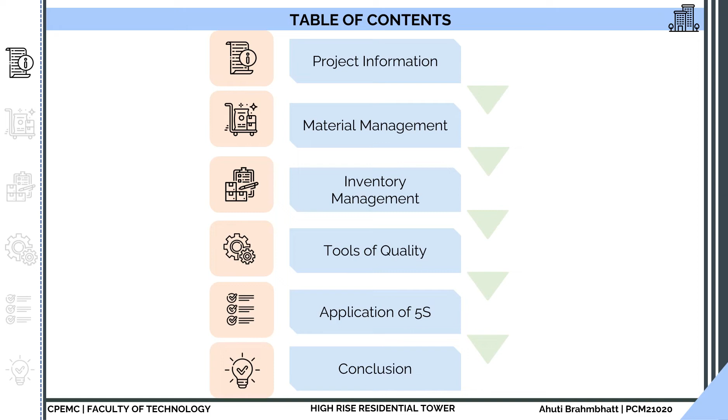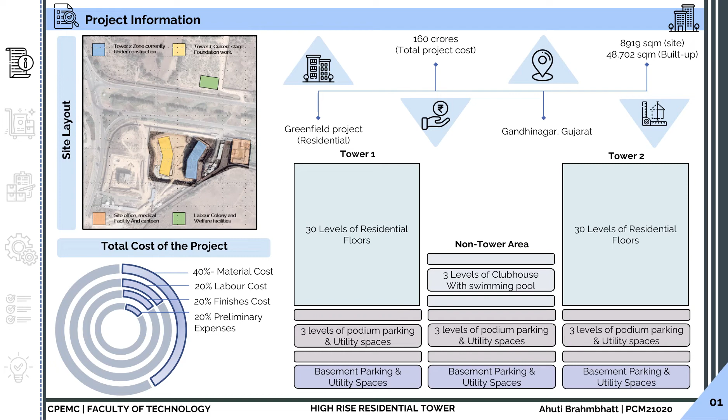Discussing the project details, it is an ongoing project in Gandhinagar, Gujarat. It's a greenfield residential project with a total cost of 160 crores. The site layout and visual representation of the project are shown here. The residential tower comprises two towers with an adjoining non-tower area, all having basement parking, 3 floors of podium parking and clubhouse in the non-tower area, and 30 floors of residential building in Tower 1 and Tower 2. The total cost of the project includes 40% material cost, 20% labor cost, 20% finishes cost, and 20% preliminary expenses.

The first activity is material management. Material management is one of the most important aspects of project execution, comprising 40% of the project cost. Talking about material store management, a layout of the material store has been prepared.

At the entrance, we have the store manager's office, and storage of material has been done by categorization named electrical material, plumbing material, and safety material.

Taking into consideration the pertaining issues in store management, 5S was applied on the material store and some suggestions are illustrated. The problems observed in the material store are improper disposal of packaging material, no provision for control of monitoring, lack of monitoring, manual estimation, and lack of inspection checks.

Some of the suggestions are provision of waste segregation bins, a material issue counter, checklists and surveillance, BIM and streamlined procedures, as well as organizing frequent audits from the head office.

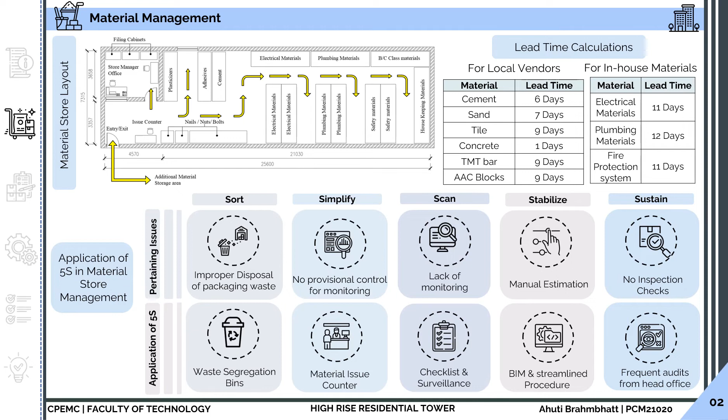Talking about lead time calculation, it helps us understand the minimum time required for the supply of material to the site. For our site, cement, sand, tiles, concrete, TMT bar, and AAC blocks are procured from local vendors, while electrical material, plumbing material, and fire protection systems are procured through the in-house team.

For material classification, ABC analysis and HML analysis have been done. ABC analysis is a technique for categorizing inventory items according to their substantial impact on the overall expenditure of the organization. From ABC analysis, it can be inferred that reinforcement steel and cement are A-class materials, while admixtures and binding wire are C-class materials.

Talking about HML analysis, it is used to distinguish materials according to high rate, medium rate, and low rate. From this, we can infer that reinforcement steel and binding wire are high rate materials, while aggregate and sand are low rate materials.

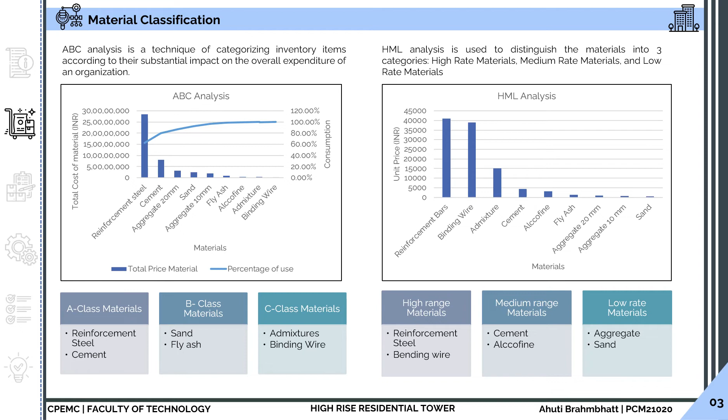The next activity is inventory management. In inventory management, economic order quantity (EOQ) has been calculated, which is defined as the optimum order quantity that minimizes the total variable cost of ordering and holding inventory.

Calculation of EOQ was done using the simple classical model. As per this model, the economic order quantity for reinforcement steel is 33 metric tons, and if this protocol is adopted on site, around 42,000 can be saved annually.

The second model is the price break model, in which different lot sizes were selected according to their purchase cost. It can be inferred from the price break model that purchase cost and EOQ have an indirect relationship, whereas purchase cost and total cost have a direct relationship. The preferred purchase cost is 64,000 for a lot size of 150 to 180 metric tons of steel.

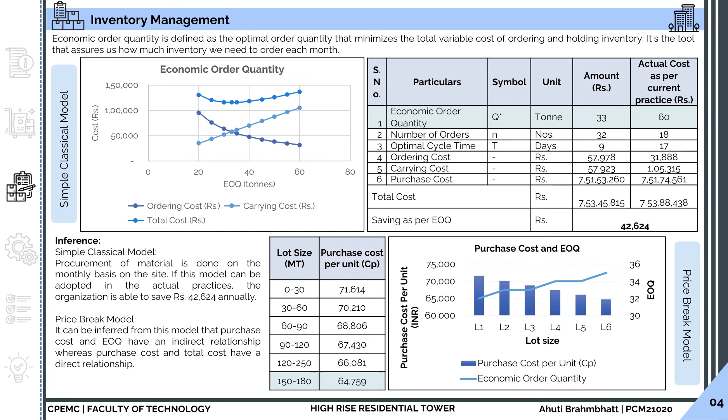Talking about safety stock and reorder point, it gives an idea of when the reorder can be placed. In the first graph, total stock-out cost and carrying cost are minimized at a safety stock of 9.34 metric tons, meaning the optimum level of safety stock is 9.34 metric tons. From the second graph, the reorder point is 39.08 tons, meaning that when inventory reaches 39.08 metric tons, a reorder can be placed, which will arrive on site within 7 days.

The next is the shortage model, in which shortages are planned to occur, leading to back ordering. From the shortage model calculation, the optimum level of 13.48 metric tons should be maintained at the site, which can reach up to 26.95 tons of maximum inventory level.

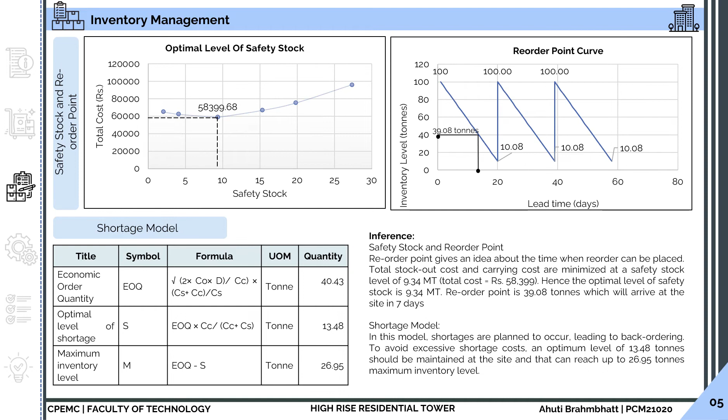Next activity is quality tools. Quality tools are implemented in the various steps of process in order to define the problems, measure their impact, find out the root causes, and solve this problem to ensure the production of non-defective items. The quality tools which this portfolio describes are control charts, Ishikawa diagram, and histogram.

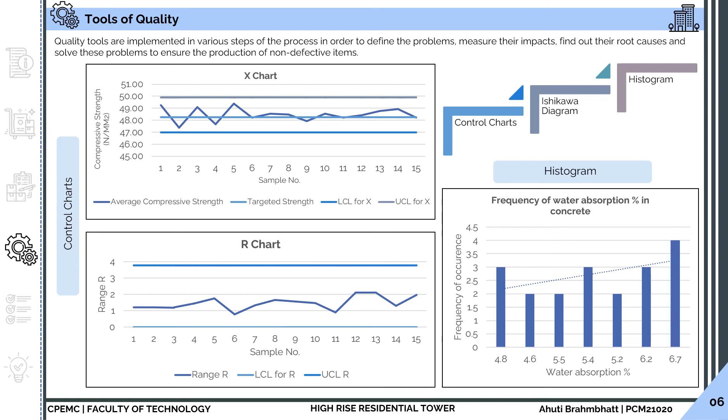Secondly, histogram. It is used to show the frequency distribution. Here, histogram was prepared for the frequency of water absorption percentage in concrete.

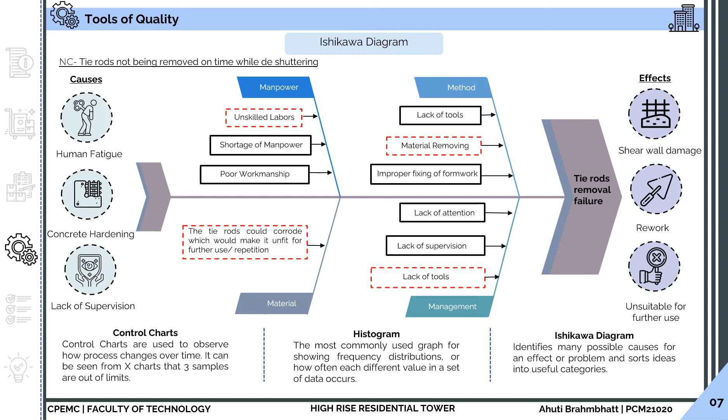Last activity for the portfolio is application of 5S. 5S is a Japanese tool which is used for increasing the efficiency and value via application of specific tools. 5S stands for sort, set in order, shine, standardize, and sustain. The scope of work selected for the application of 5S is steel stacking yard.

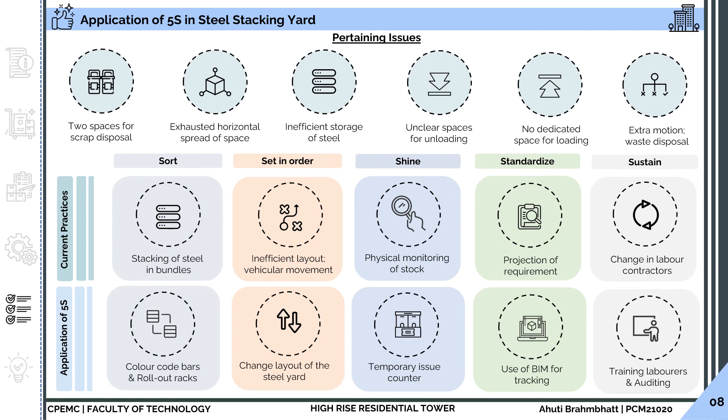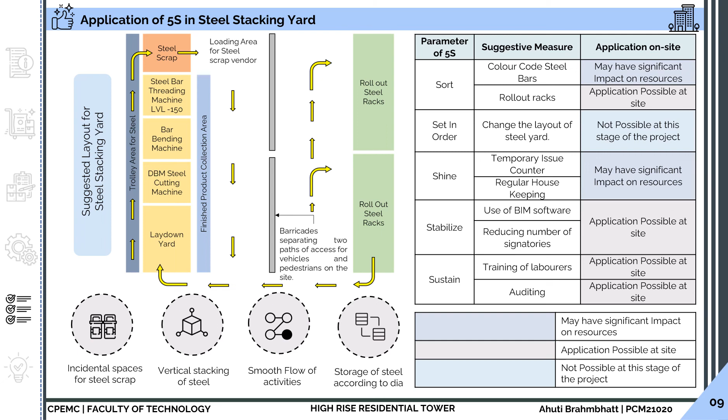From the enlisted suggestions, some of the suggestions are possible at this point of time, which are provision of rollout racks, use of BIM software, training of laborers and auditing on a frequent basis, whereas change in the layout of the steel yard is not possible at this point of time. And some of the suggestions have a major impact on the resources.

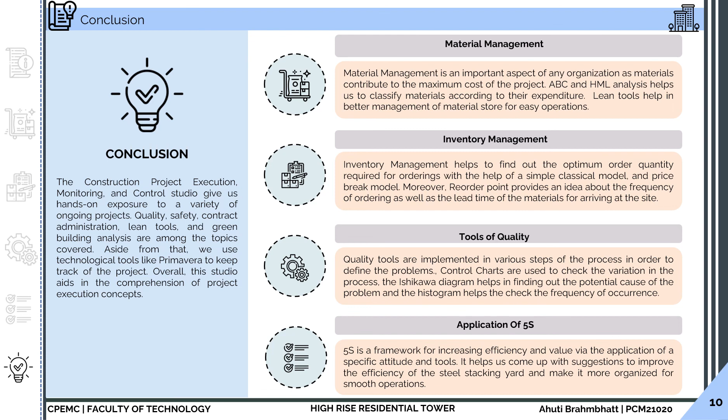Last is the application of 5S. So 5S is a framework for increasing the efficiency and value by application of specific attitude and tools. It helps us to come up with suggestions to improve the efficiency of the steel stacking yard and make it more organized for smooth operation.